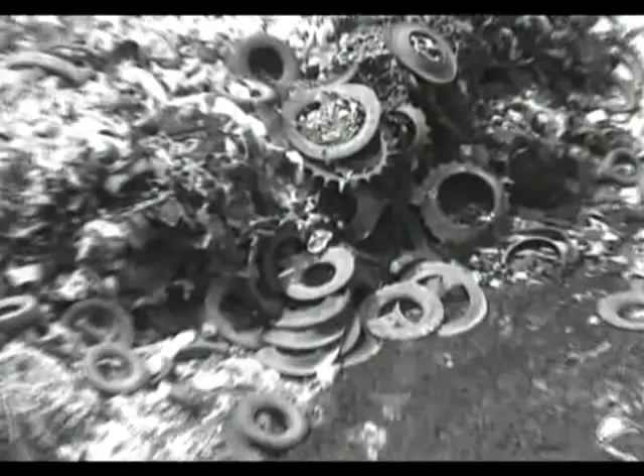Waste incineration plants do not rule out recycling due to the fact that a great deal of combustible residue will be left behind even after recyclable materials have been sorted. So a modern waste incineration plant disposes of waste, whilst the energy capacity of such disposal can also be used to produce heat and electricity. The question is how? This you will find out in the next few minutes as we introduce you to the operation of the Termizo Joint Stock Company Municipal Waste Incineration Plant in Liberec.

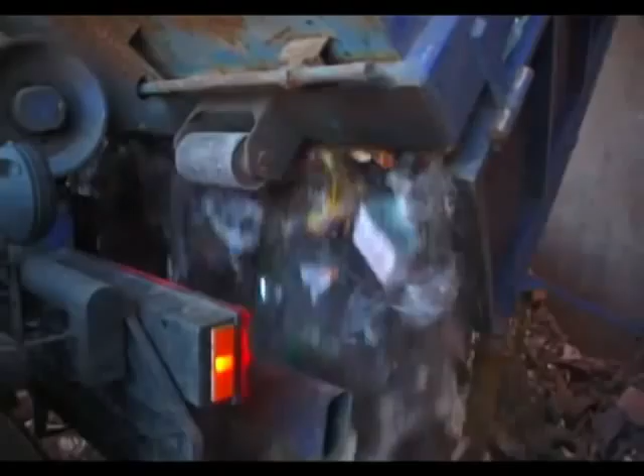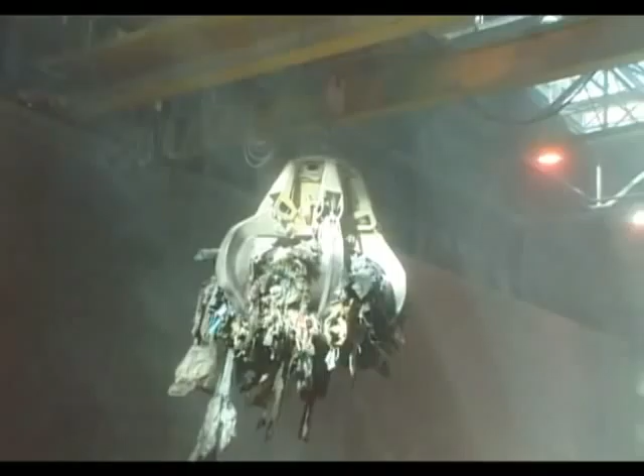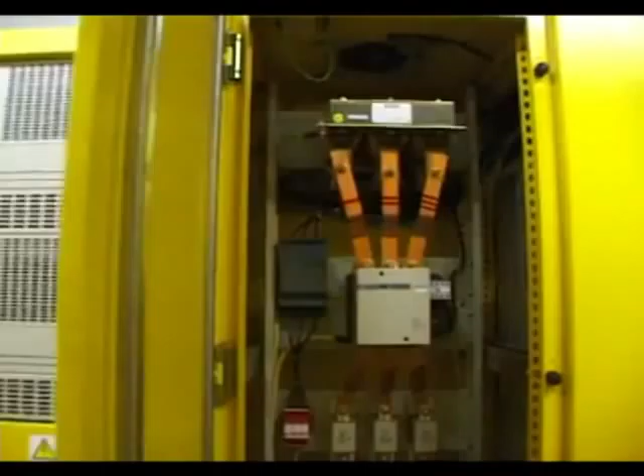The incineration plant is a facility for the energy exploitation of waste. Primarily solid municipal waste which would normally end up at disposal sites is thermally utilised here. The annual capacity of the Termizo facility is 96,000 tonnes, which corresponds to half the waste produced in the Liberec region. Capacity is therefore easily fulfilled. The annual heat supply to the central distribution network amounts to 600,000 gigajoules. The facility also supplies 6,000 megawatt hours of electric energy into the distribution network per year.

The Liberec Termizo incineration plant was put into operation in 1999 and has been working smoothly ever since. Operation at the plant is ensured by 4 highly trained professionals that work in continuous shifts. Most of the technological units here are fully automatic. The operators observe and monitor the functioning of individual parts of the incineration plant.

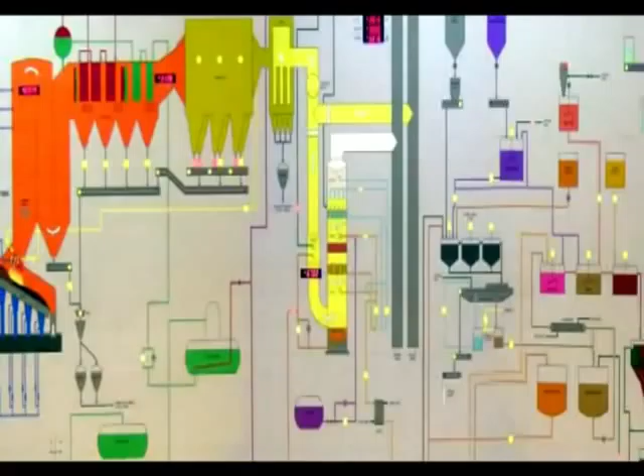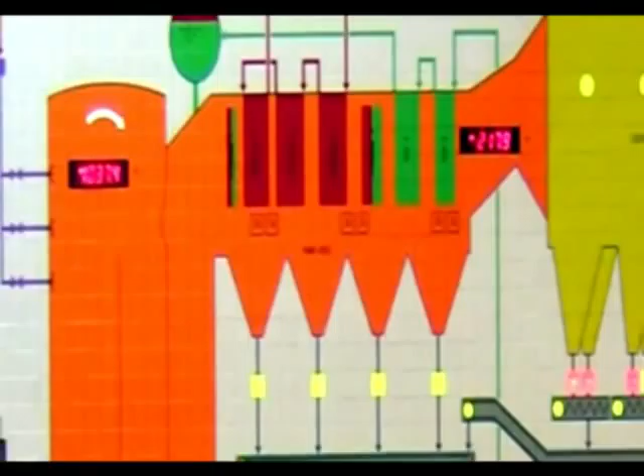The system through which the incineration plant literally changes waste into electricity and heat is illustrated on this chart. Waste is first stored in a bunker, from where it is transferred to the boiler. Here the process of controlled combustion takes place. The steam produced is then fed into the heating plant and subsequently passes through the centralised heat supply network to individual customers in Liberec. In the meantime, the steam is put to further use inside a turbine, where it drives a generator which produces electricity for company use. The steam then passes to the energy distribution network. This is how the Termizo incineration plant works, but now let us take a closer look at the technology involved.

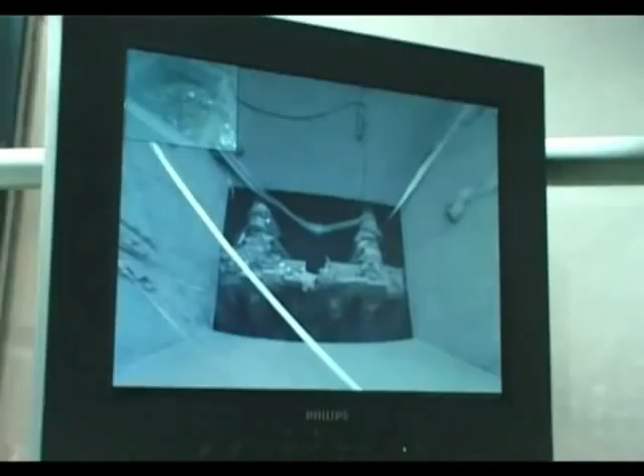Solid municipal waste is transported into the bunker, which is accessible through 5 hydraulic-driven gates. The waste is mixed by a crane and so continually prepared for perfect combustion. Bulk waste is ground using hydraulic shears when necessary. After preparation, the crane operator loads the waste into the boiler hopper. As we have already mentioned, the facility is capable of processing 96,000 tonnes of waste a year, which means that 12 tonnes of it passes through the hopper every hour.

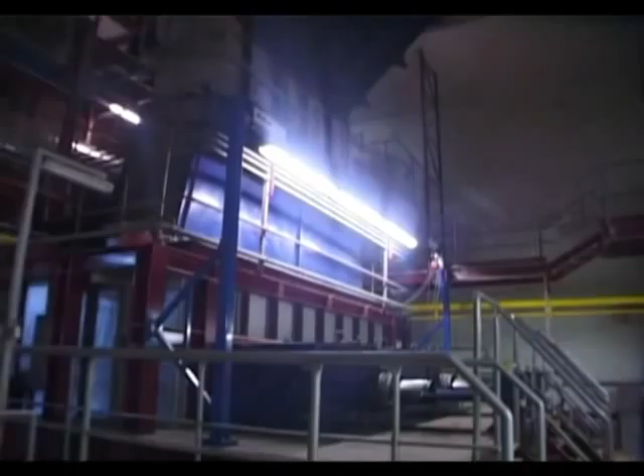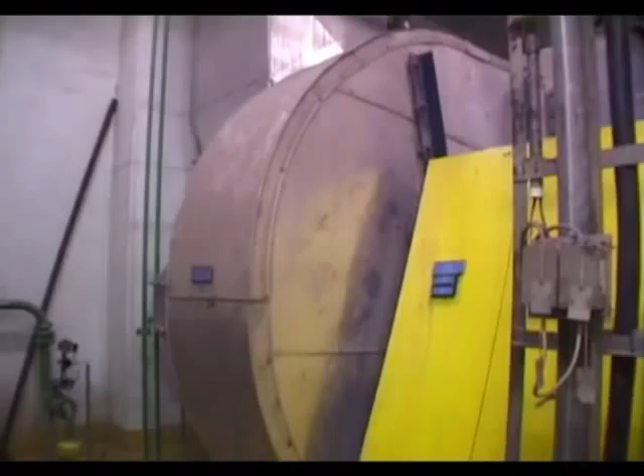The waste travels from the hopper to the hydraulic feeder, where it is further pushed onto a grate. The process of waste combustion takes place on this movable grate. Combustion air is then supplied for burning. The air is driven underneath the grate from the waste bunker via a fan and heated by a steam heater. This causes slight negative pressure inside the bunker, which reduces the emissions of dust and odour into the immediate vicinity.

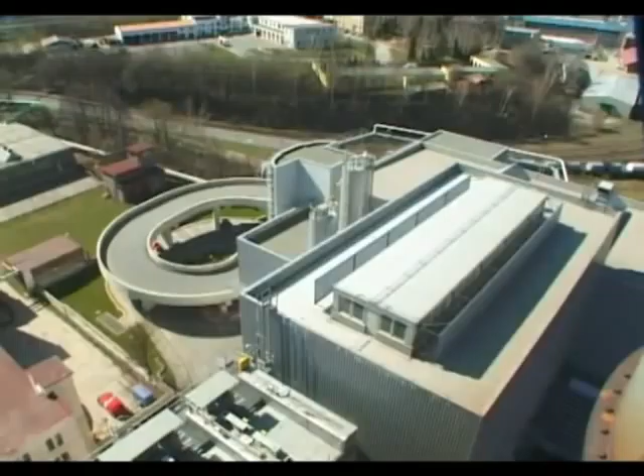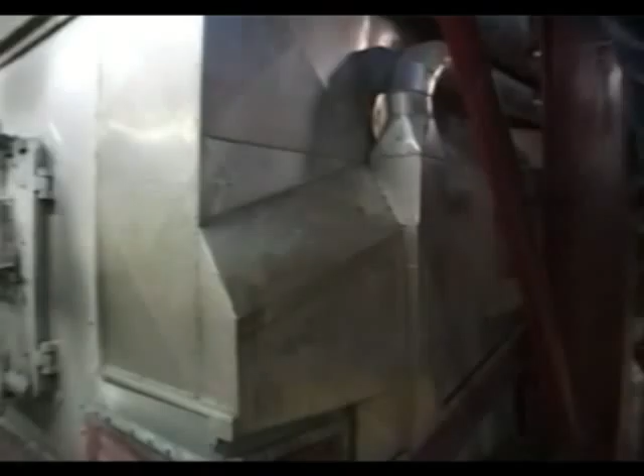So-called secondary air is also supplied for burning. For this purpose, the facility uses recirculated combustion products, which are led from the boiler and blown into the combustion chamber by a fan. The amount of combustion product emitted through the chimney into the atmosphere is thus reduced, and the combustion process is executed in an ideal way.

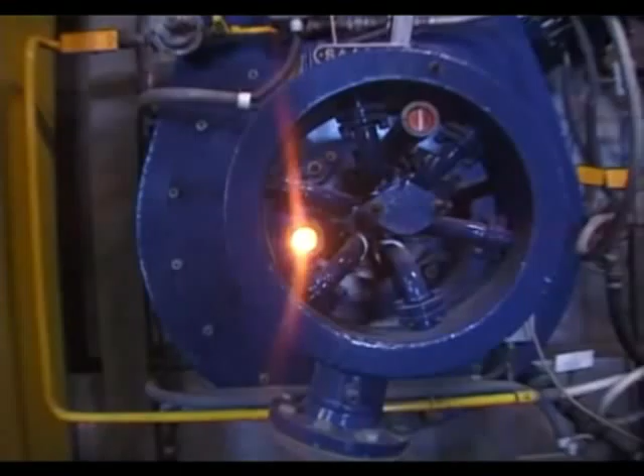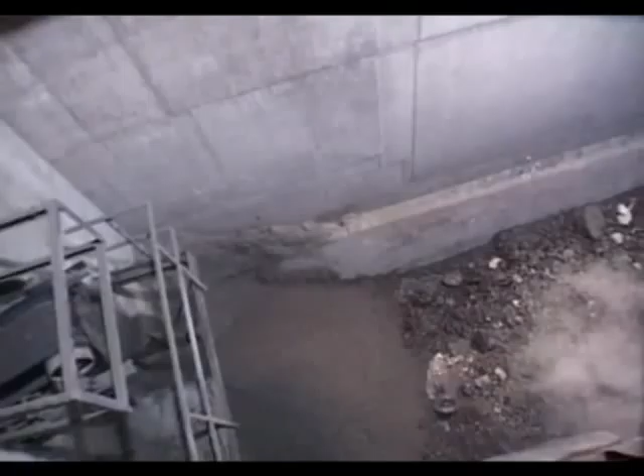The waste is ignited using natural gas, and the combustion process is fully automatic. A control system monitors individual combustion parameters and continuously assesses possible deviations from the required state. Thanks to all this, ideal combustion and high quality incombustible clinker and ash residue are ensured. The maximum content of carbon in burnt clinker is 1.5%. This value is an indicator of high quality combustion.

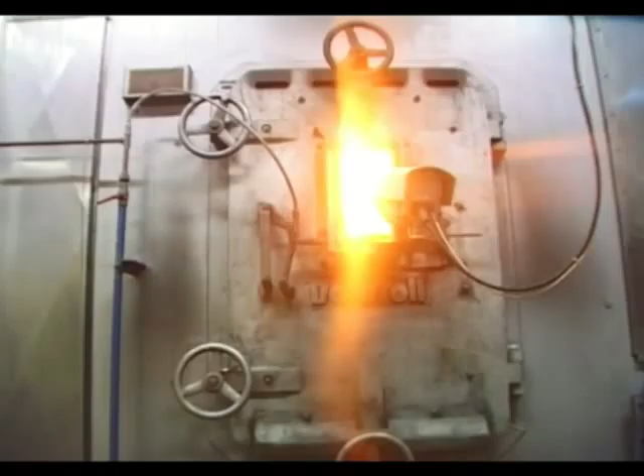The combustion temperature on the grate varies from 900 to 1200 degrees Celsius depending on the capacity. The temperature in the burnout zone behind the combustion chamber, where combustion products stay for around 2 seconds, is between 850 and 1100 degrees Celsius.

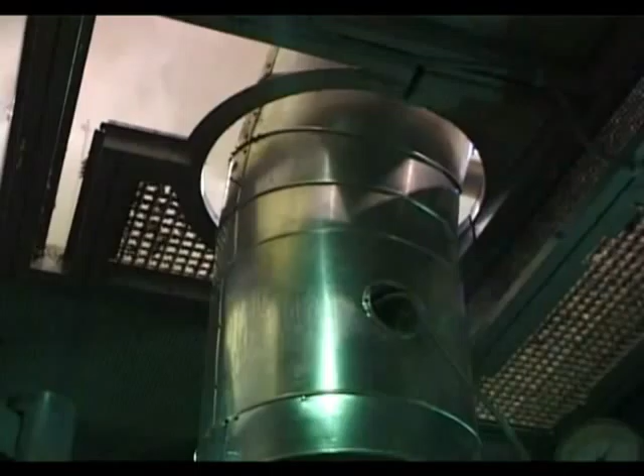The energy released during waste combustion is taken from combustion products in the form of heat and passed on for the production of water steam. The nominal output of the steam in the boiler is 35 tonnes per hour. The steam temperature is 400 degrees and the pressure 40 bars.

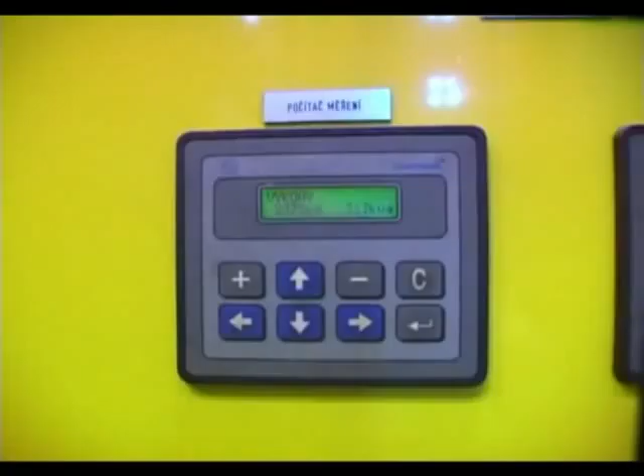The steam is first fed into a steam back pressure turbine with nominal output of 2.5 megawatts. The steam parameters are reduced here to a temperature of 230 degrees and a pressure of 10 bars thanks to the reduction in the turbine. 6,000 megawatt hours of electric energy are thus transferred into the electric distribution network. The steam from the turbine is fed into the central heat supply system in Liberec. The amount of effective heat supply is approximately 600,000 gigajoules per year.

The process of the combined production of heat and electricity described above is called cogeneration. The efficiency of using the steam produced is around 80%, which proves the high energy efficiency of the process. Half the amount of the electricity produced is for the facility's own use, in other words, for ensuring the operation of the incineration plant. The rest is supplied to the energy network.

In addition to high energy efficiency, emphasis is also placed on ecology at the Liberec incineration plant. The resulting combustion products, as well as the water used, ash and clinker, are all cleaned. Therefore, the heat and electricity produced at the incineration plant are generally amongst the cleanest sources of energy.

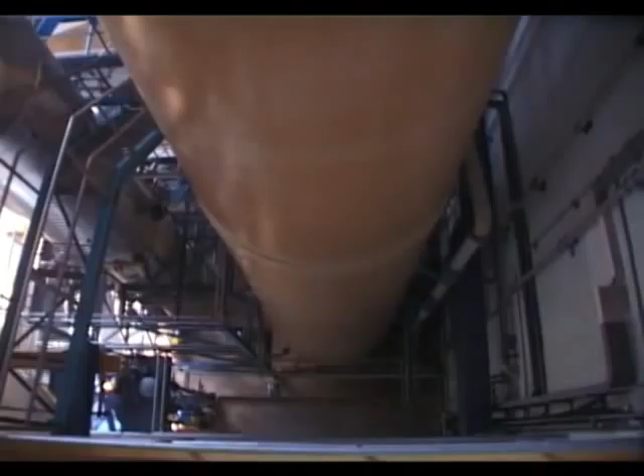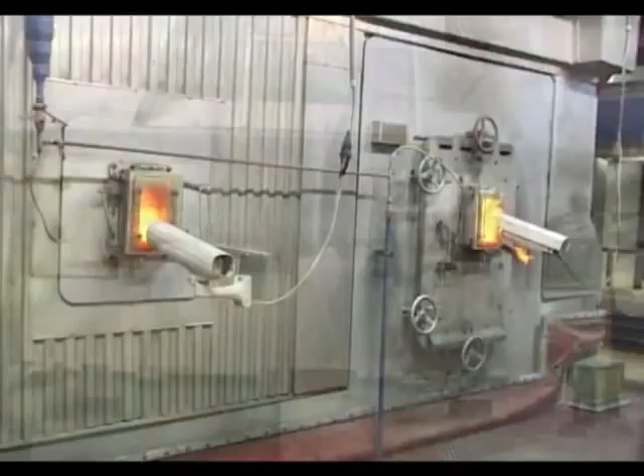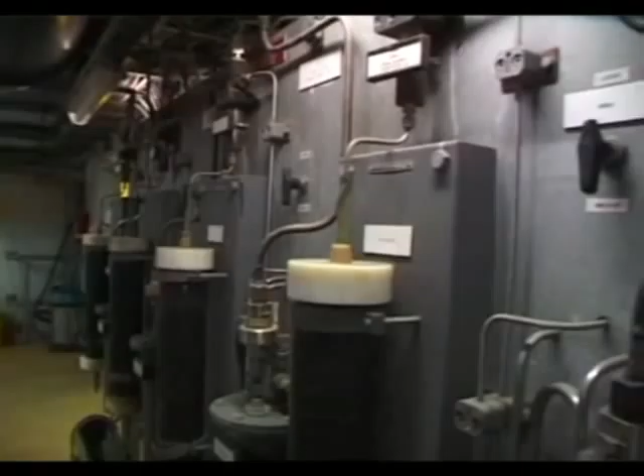We should first introduce the process of combustion product cleaning. Very strict emission limits are laid down for waste combustion. 4 stages of combustion product cleaning have been installed at the plant to meet these limits. These are the reduction of nitrogen oxides, the capture of ash, the capture of dioxins, and the wet cleaning of combustion product. The reduction of nitrogen oxides in combustion products takes place in the combustion chamber itself, where a 25% solution of ammonia water is supplied. So-called selective non-catalytic reduction subsequently takes place here.

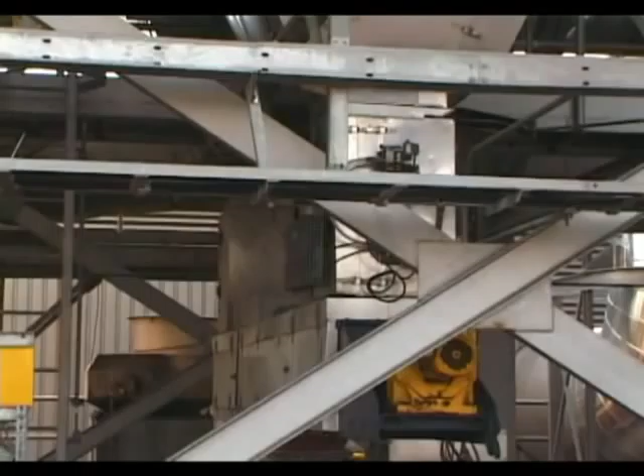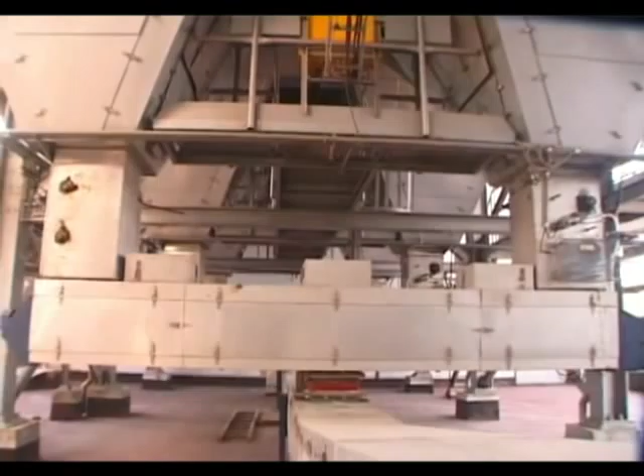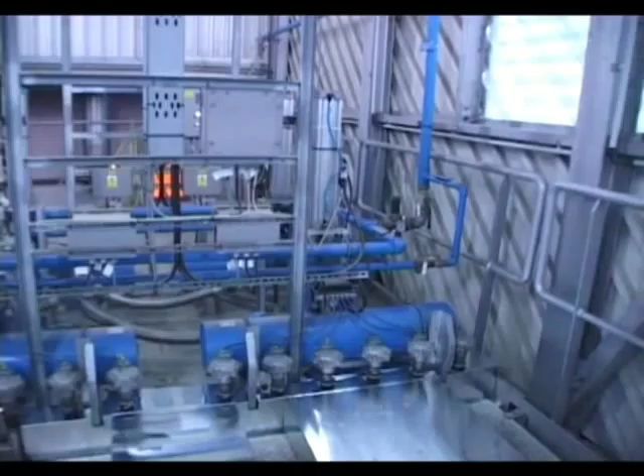The ash contained in combustion products is captured by an electric separator. From discharge hoppers at the bottom of the separator, the ash is transported into the ash silo for further treatment. The residual part of the ash is then captured by a catalytic cloth filter, whose principal function is the decomposition of dioxins. Dioxins are disposed of via a special filter. The filter degrades dioxins into elementary components, i.e. water, carbon dioxide, and hydrogen chloride, by means of catalytic oxidation. Oxidation occurs in the layer of the cloth filter with a filtration area of 1,800 square meters.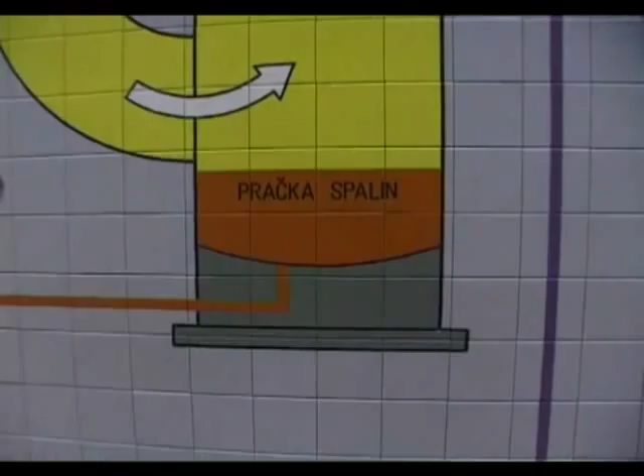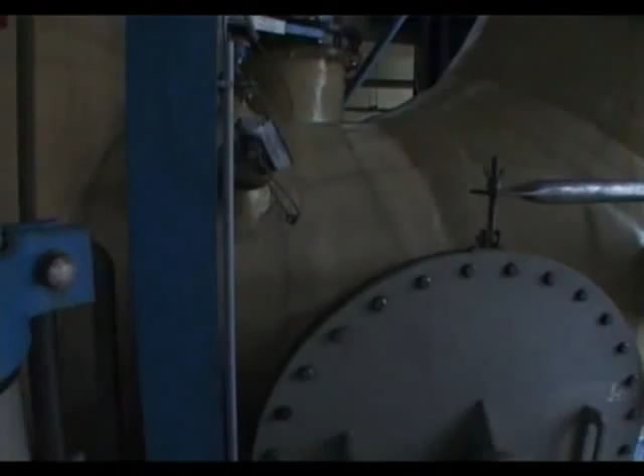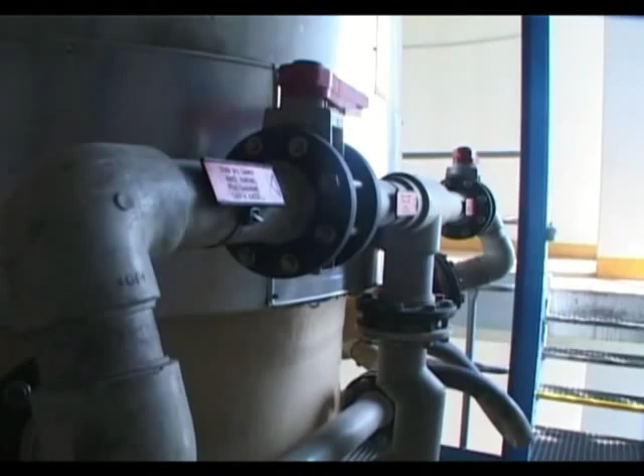The oxides remaining from combustion products are cleaned using a wet process. A scrubber for combustion products is used for this purpose and works in 3 stages. The first stage is a cooler or quench. This cools the hot combustion products to a temperature of approximately 65 degrees Celsius by injecting wash water. Smoke gases are saturated with water, which absorbs the major part of gaseous acids such as hydrogen chloride and hydrogen fluoride. The quench also condenses gaseous metal oxides, for example mercury. Coarse gaseous impurities enter service water during the process.

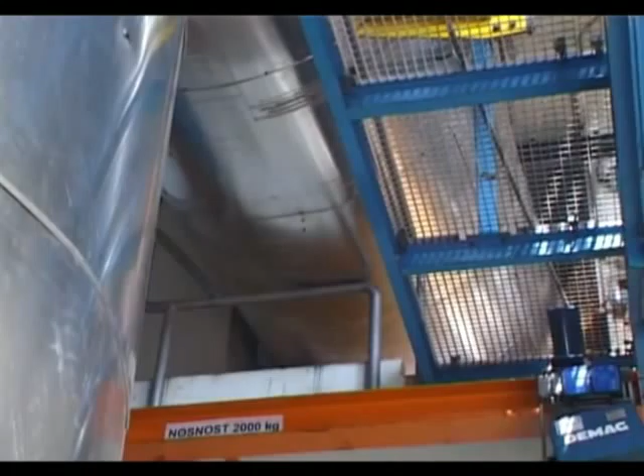Sulfur dioxide and sulfur trioxide are absorbed in the second stage of the scrubber. Here, the combustion products come into contact with softened water, into which caustic soda is added in a controlled manner. The combustion products head upwards and thus pass through the scrubber lining against the flow of the wash water. As a result, the exchange of substances takes place and sulfur oxides are removed from the combustion products while the value of pH in the wash water is maintained at 6. The third stage of the combustion product scrubber is a ring jet.

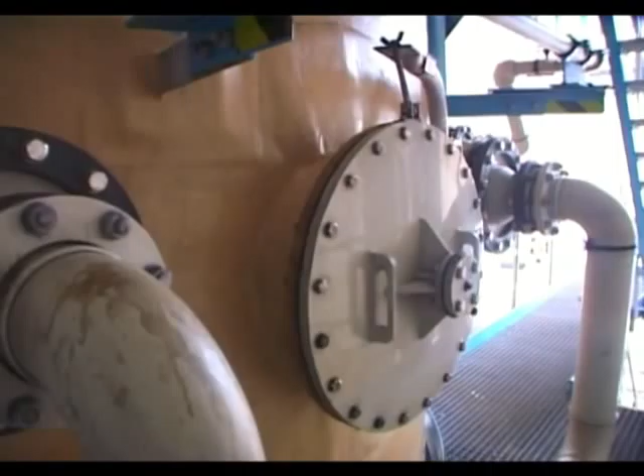This ensures the separation of dust and aerosols, i.e. the smallest particles. After leaving the third stage of the wet cleaning process, combustion products move to the chimney. The temperature of the combustion products is approximately 65 degrees Celsius upon leaving the scrubber. The cleaned combustion products pass through the service chimney into the atmosphere. The measurement of combustion products takes place continuously at the very end of the chimney.

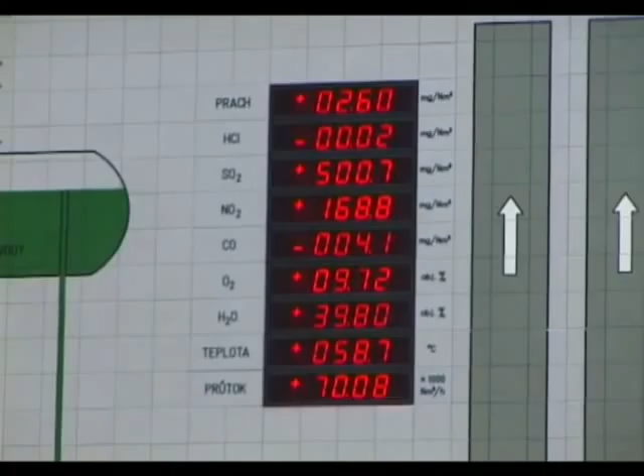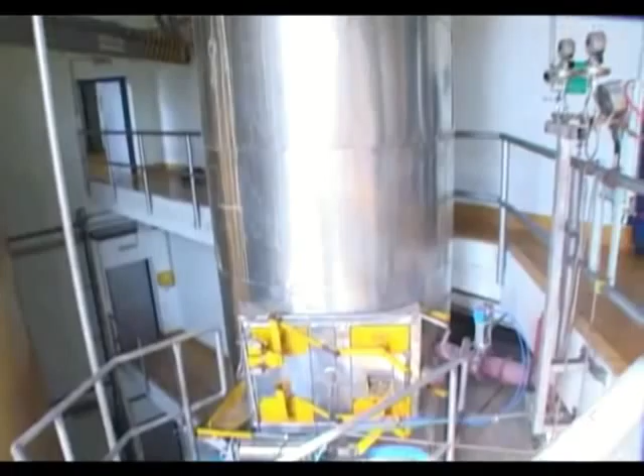In the event of scrubber failure or a power cut, the combustion products are automatically redirected into a so-called emergency chimney, which is permanently closed by automatically controlled dampers. The combustion process stops simultaneously, and for the necessary period of time, only the combustion products from the waste burnout in the combustion chamber are released into the atmosphere. The combustion products are thus safely emitted into the atmosphere even in the case of emergency.

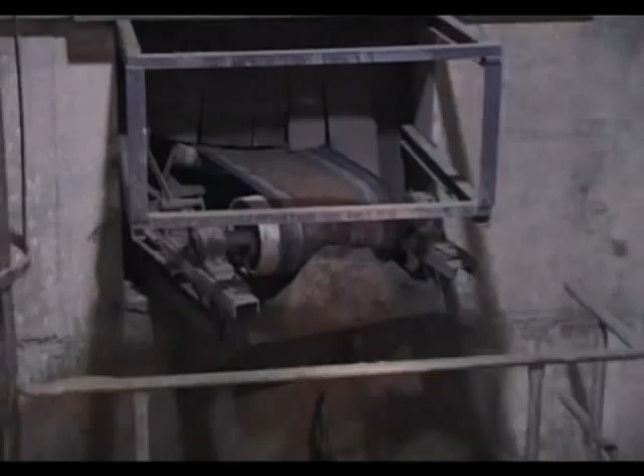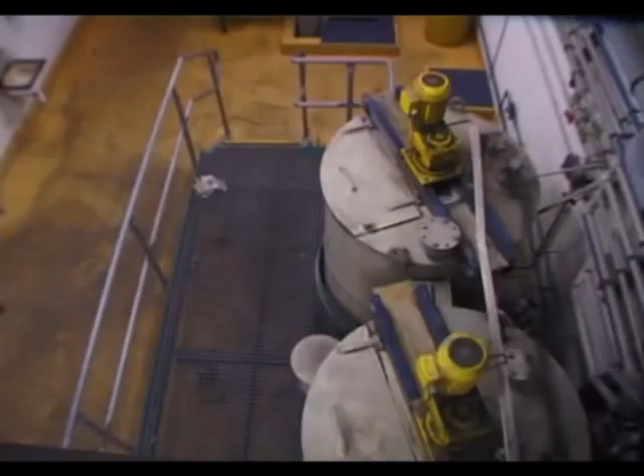Ash and slag are also generated by the waste combustion process in addition to combustion products. Soluble salts and extractable heavy metals are removed from crude ash to ensure that it does not exhibit any dangerous features. This is all achieved using acid water, which comes from the scrubber, particularly its first stage, the quench. The ash, which is stored in the silo after having been removed from the combustion products, is fed into a trio of extraction tanks. Here it is leached in acid water with pH 3.5 and a temperature of 65 degrees.

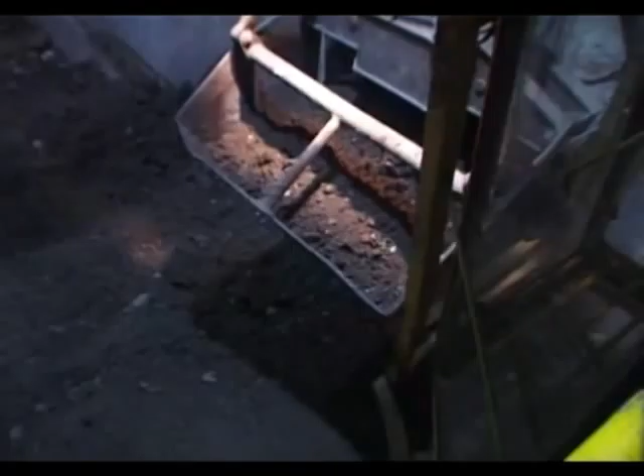The process of dehydration subsequently takes place on a vacuum filtration belt. Ash that is washed in such a manner moves to the slag bunker, where it is mixed with slag. This does not show any dangerous characteristics either. The material created is used in the building industry, for example for landscape restoration. The characteristics of the product are guaranteed thanks to production that is in line with quality certification.

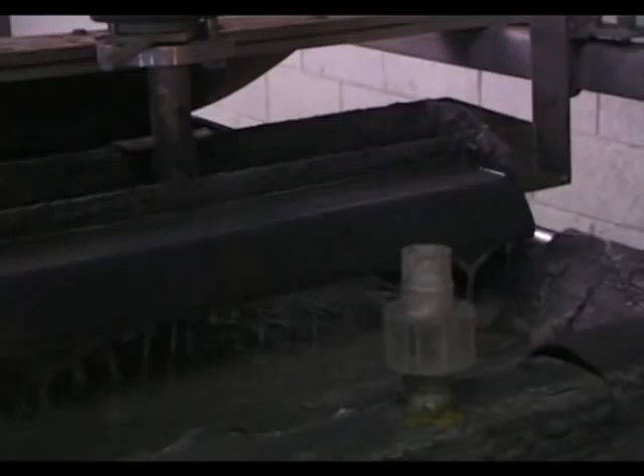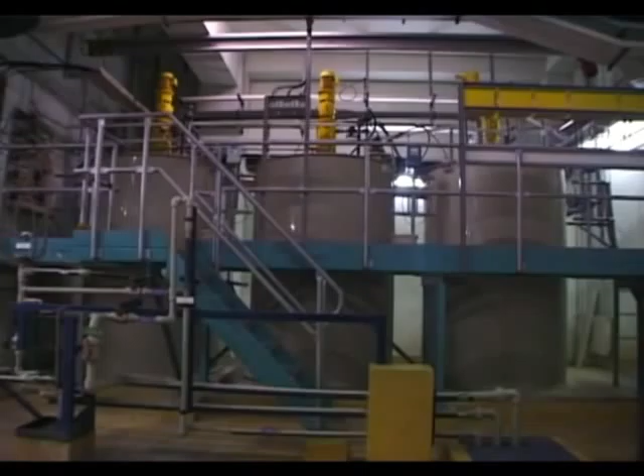In order for operations at the plant to be genuinely environmentally friendly, it only remains to clean the water that is used for both the wet cleaning of combustion products in the scrubber and for the leaching of ash. Acid water passes to the water treatment plant, which consists of three parts. Chemical substances such as whitewash, hydrochloric acid and others are gradually added to the water.

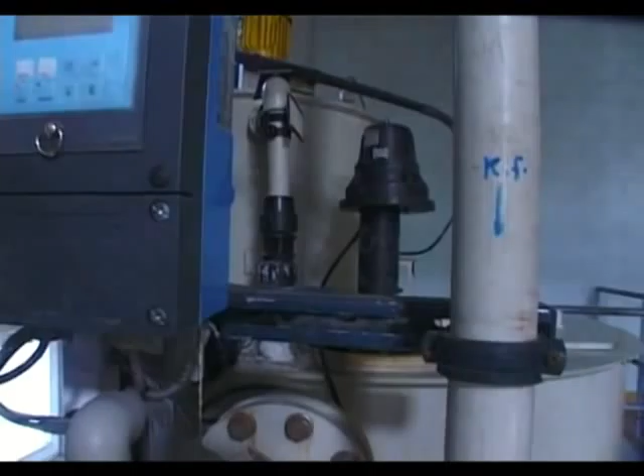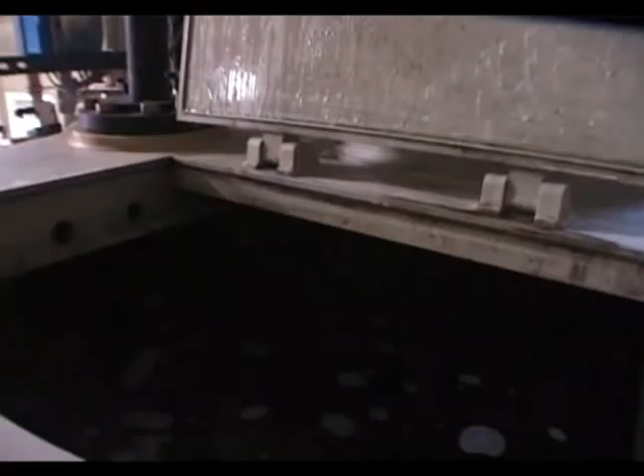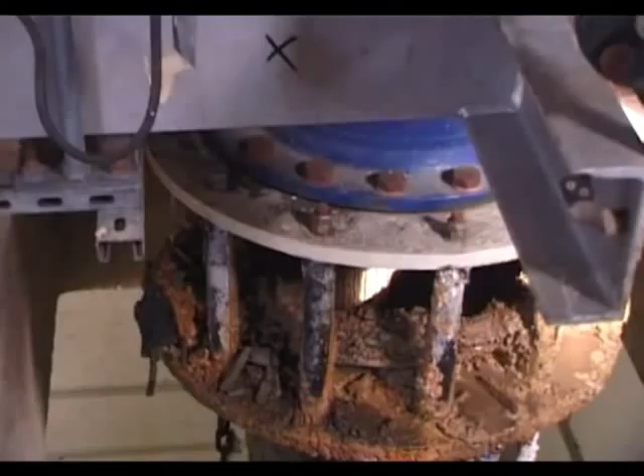Heavy metals are released at a pH of 9.5, and these metals then settle into a fine sludge in the form of flakes. The sludge settles in the sedimentation tank, from where only clear water flows for final inspection. This is the final stop before the water is discharged into the sewer system. The sludge from the sedimentation tank is washed and dehydrated in a candle filter until solid waste, a so-called filter cake, is created. This is collected in special containers and taken to be solidified, after which it is disposed of at the hazardous waste disposal site.

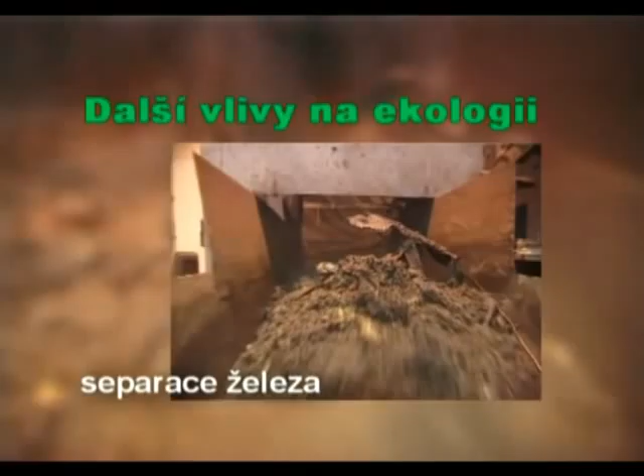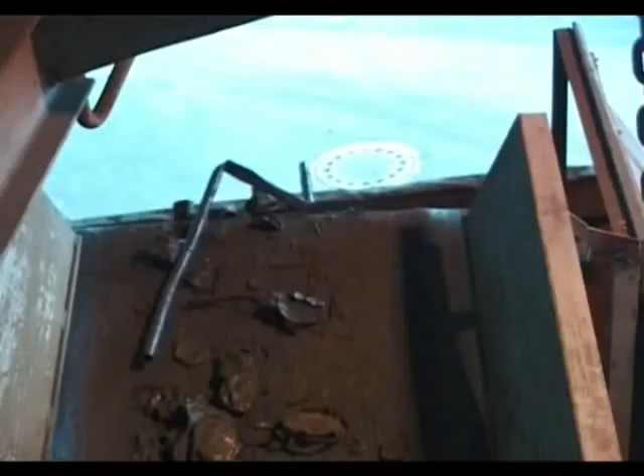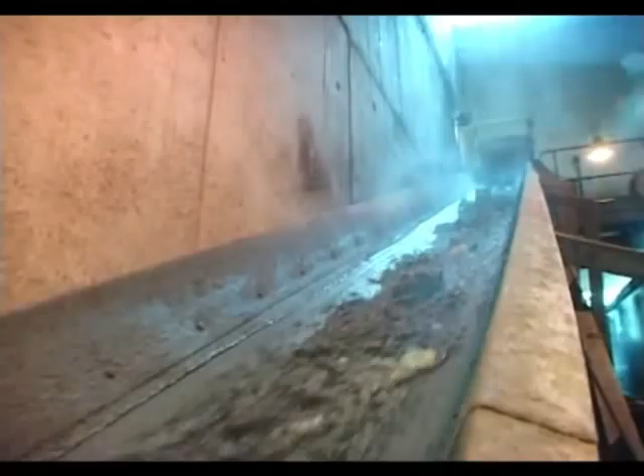Another ecological benefit is the fact that the energy utilisation of waste saves primary raw materials. In fact, the production of heat at the incineration plant reduces the production of other energy resources, and in the case of the Liberec plant, the 100% output means that 17 to 20,000 tonnes of heavy crude oil are saved per year. This is beneficial both for the environment and for people.

The operation of the Liberec incineration plant is complex indeed, and we can only hope that we have managed to explain its functioning as clearly as possible. Let us not destroy the environment we live in. Let us try to use seemingly useless waste to our own benefit. Our children will undoubtedly appreciate it in the future.